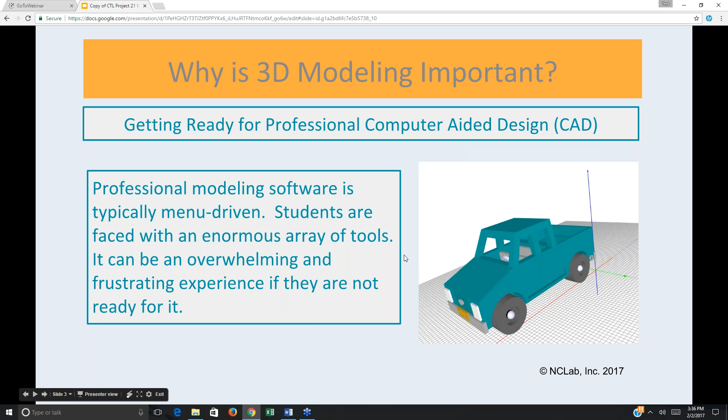They're going to be more successful if they get that visual spatial reasoning underlying what they need to do in the programs. And that involves learning how to move, rotate, scale objects, subtract objects, and other essential solid geometry skills. You'll see what I mean here in a moment. And also how to build complex designs from simple ones.

Here's some examples. This is a teepee that's built actually from a cone by changing the cone characteristics. Here's a DNA model that's built using a simple set of bars and then running them up a spiral. And over here is a three-dimensional Tetris, which is quite fun to work with. But boy, that really stretches your understanding of rotation and movement when you try and fit the pieces together.

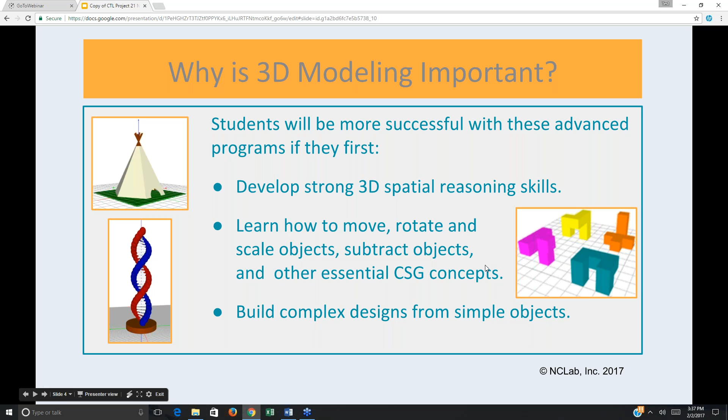So this is the other main reason why we're doing this: jobs. Think of the companies that are moving into Nevada, they want their technicians to have a solid foundation in these skills. So here's some examples. Manufacturing - you might be building a prototype or you might be on the production line, but you're going to be using those skills either way.

If you go into entertainment, animation is a huge component of entertainment. Think of all the movies you've watched recently, whether they're realistic or cartoons, they use computer graphics. This is also used to train people. It's used in sales. It's used in forensics to model what might have happened. And then if we look at science, we model things all the time, whether it's a molecule to a large-scale model of the universe.

In engineering, we build models and test them. And this is something that you can do even in a simple software like ours - you can build a model and test limits on it. Architecture is definitely built up of simple geometric components. Think about operating drones in 3D space - you're moving them in different directions, up, down, tilting them, rotating them, and so forth.

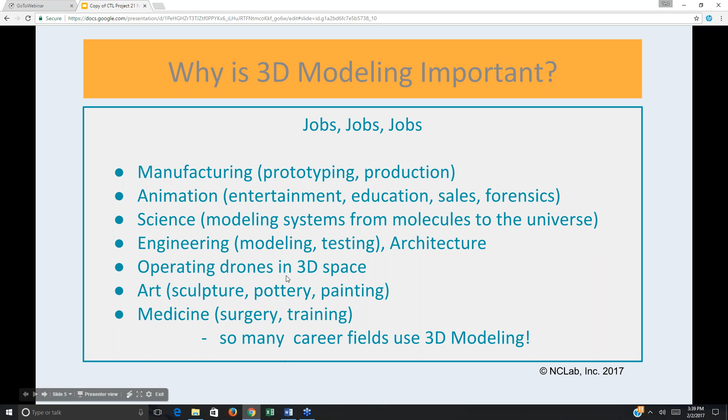Medicine - surgery these days, doctors are going in with cameras and working on organs within the body in 3 dimensions. And you can think of the old medicine, people worked on cadavers. Well, they don't do that so much anymore. They use 3D software to train on what they're going to be doing on real humans. So many career fields use 3D modeling, and there's plenty more besides the examples I've listed here.

Okay, so it's fun. It's a fun way to learn. It helps you visualize mathematical concepts, and students really enjoy building their own creations. So here's some examples of models that were built in the software and then fabricated on a 3D printer. There's a Colosseum, there's a functional gear, and there's a beautiful flower. So there's architecture, there's engineering, and art.

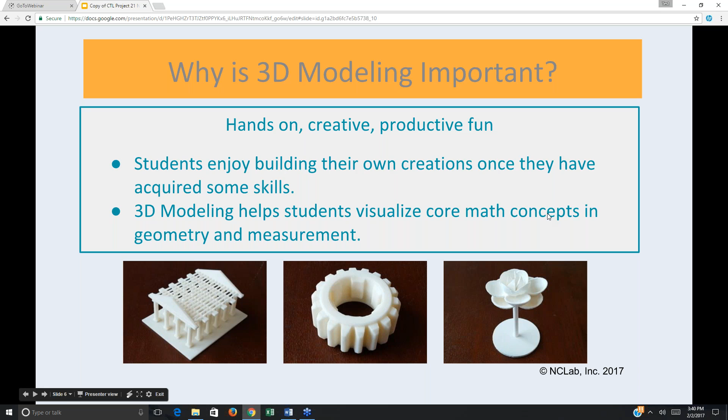All right, so last time we looked at Karel, and the screen for 3D modeling is very similar. You're typing code on the left-hand side, and then when you run it, you produce a model on the right-hand side. So you get instant feedback for anything that you script. The script builds language, it builds logic, it's writing and math, and the model on the right, that's what the results are going to look like.

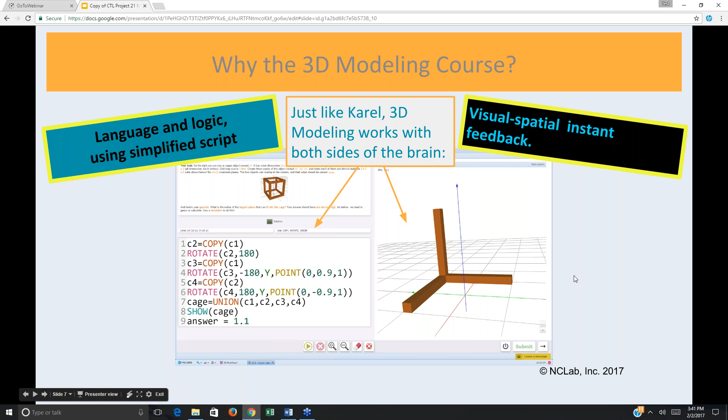So you're working with multiple areas in the brain, both sides if you like to use those terms. And this is powerful for building all these senses that we want in our kids - their math senses and their visual spatial senses.

So it's actually very easy to write, and then if you want to make a bigger sphere or a smaller sphere, you just change that number, and this is where it starts.

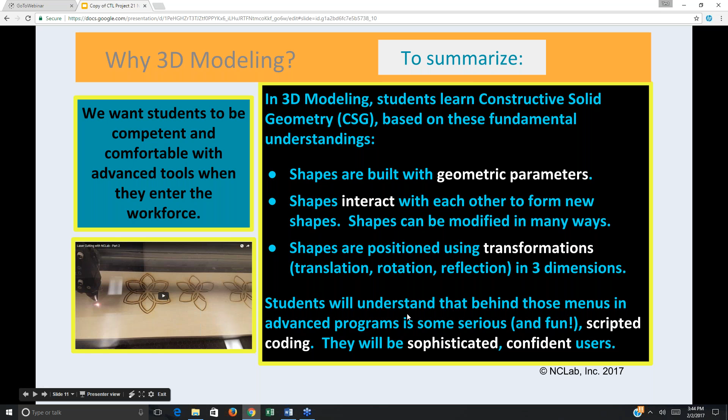By the end of the unit, they're going to be able to script many different 2D shapes, move them in the XY plane, subtract and combine them to form complex composite models, and then extrude them to 3D. Extrude is a very simple command, it just makes a plate out of this design, so they can even start printing any of these objects right from the beginning.

But of course, we're adding the scripting piece, so they're actually assigning numbers to that. By the end of that unit, they have learned how to create 3D objects, such as cylinders and cones and tubes, and they're starting to learn some complex rotations in 3 dimensions.

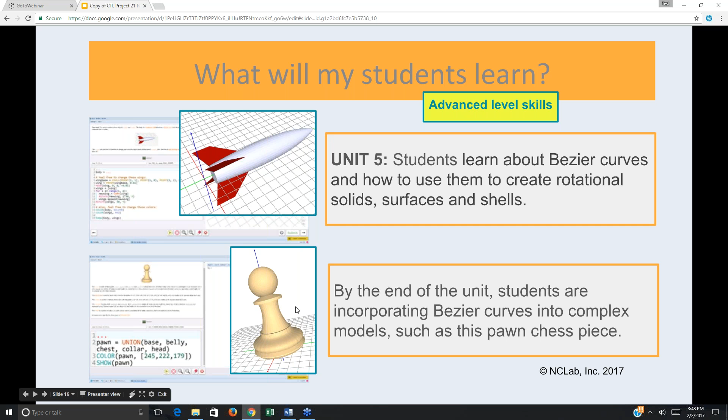So they should be able to create an object like this chess piece at the end. And that's the course in a nutshell. All right, so how are they going to learn this? Well...

Self-paced and self-graded means just that. You can use the course just by itself. There's always some form of context to give them ideas of where they could apply their skills.

Every section has step-by-step videos showing them how to do it. There are a series of instructional screens that build in the understanding of what they're doing. There are demonstration levels where they might just run it or just add a simple piece of code. It's mostly done for them to see how it works.

The sections are all scaffolded, so they start with something simple and build to more complex, and also start with a lot of the code written and move towards the students writing the code for themselves. There's a feature called the code template, which is a button. If they get really stuck, they can hit that button. It'll supply most of the code so they can fill in the blanks.

You can see this from your teacher view, which students have used this and which have not. There's a drop-down help menu, which is a list of commands and has a textbook and videos that they can access at any time. We're going to look at this, see what this looks like in a moment here. When they submit a level, they'll always see how they did and get some feedback.

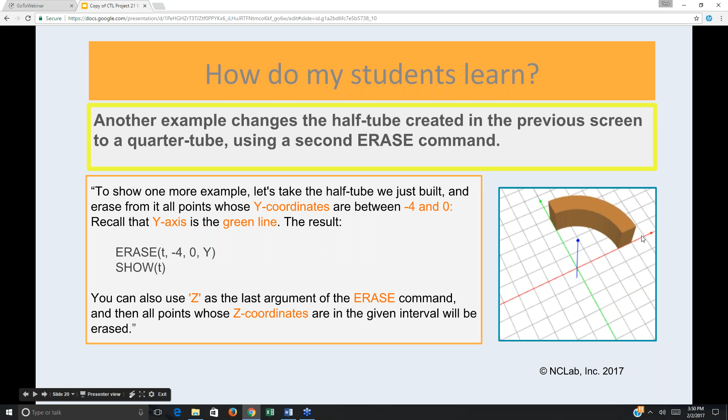And then at the next screen it states the objective and provides an example. So here's a tube, and they're showing what happens when you erase half the tube and you get this shape here. And then there's a second example provided. In this case, we've erased it in half again, so now we have a quarter. And then the next screen is the video. So students would then watch this video to see how to do this whole process.

All right, so now they get to try the code themselves. On the left, you can see what the screen looks like without the code template. So they're actually writing a lot of the code, or just about all the code, actually. You can't see it because the writing's really small, but in the upper left, most of the numbers are provided and the instructions are pretty explicit. This really is a guided practice.

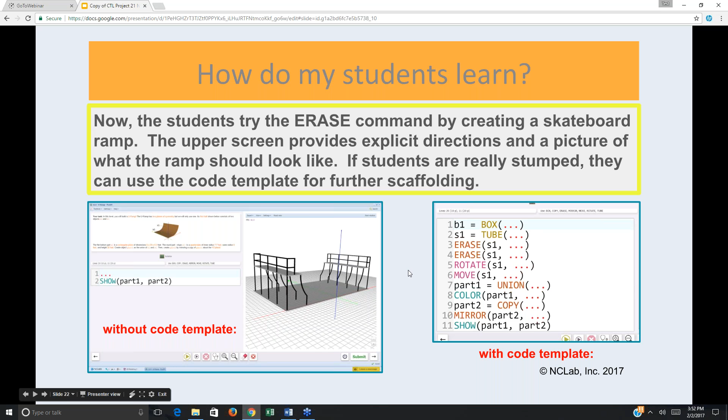If they have trouble with that, even with all that guidance from the top screen, they can use the code template, which is the red button at the bottom, and it'll pop up this, so it becomes fill in the blanks. So that's going to help your students who are maybe not very confident or they are struggling for some reason. They can use the code template.

All right, after they submit it, they're going to get some feedback. I made some deliberate mistakes in here, so it popped up this box on the left. It said try again. It explained why it didn't work. And then on the picture side, it shows what I drew in red. There's my tube way over here. It's way too big and it's in the wrong spot. And it also shows what it should look like in green. So I get a visual feedback as well on how it was supposed to work and why it didn't work.

This is how the course is built. They're learning one level at a time, and right now the 3D modeling course is divided into 5 units. Units 1 to 4 have 5 sections, and you can think of a section as a concept arc. Each section has 7 instructional levels, then a quiz level, and a project level, where they can design their own objects based on what they've learned. That gives you a performance task you can evaluate for grades. So the levels each represent one step of instruction or practice within the concept arc. By the end of 7 levels, hopefully they've got it. This is systematic instruction with practice and gradual release, and there's 234 levels in all, so it's very gradual.

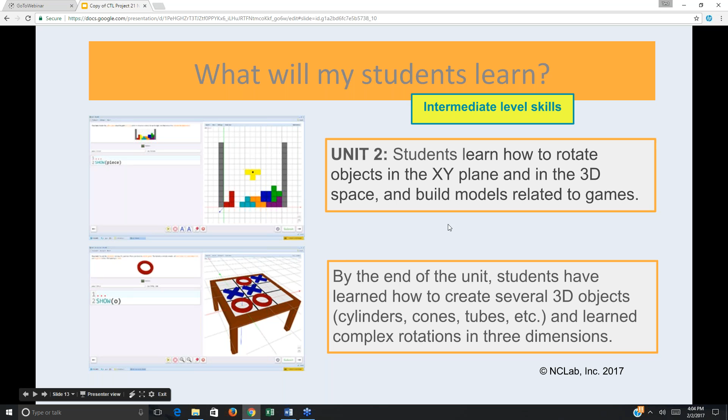So, yes, you could make this fill a full semester, especially if you add student journals and other activities, maybe a group project, or maybe have them apply it to a STEM subject area. That's good.

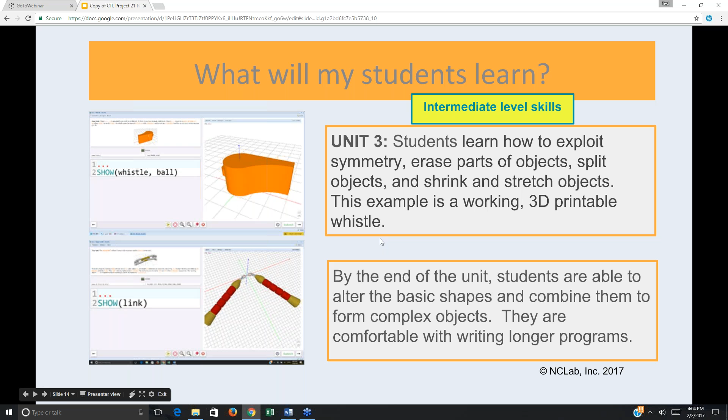Yeah, and yes, some of this stuff is pretty advanced, but it depends on what skills they're coming in with. I think as our students grow, they'll have had a little more experience with, say, basic coding, and then the coding's not so intimidating. Sorry, I'll just finish off that: if you have a high level student, that's great. Have them build stuff. They will be entertained for hours and hours because with building the sky is the limit.

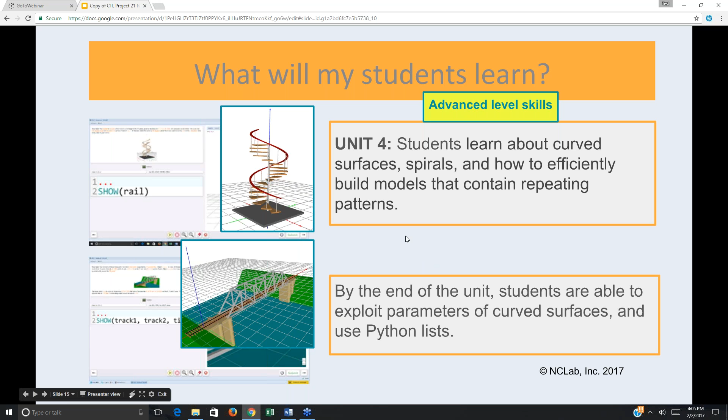The question I had was, in the teachers seeing where the students are at, does that keep track of how long they've actually been on the site or coding? Not in 3D. We do show in Karel and Tina, it shows how long they've spent on each level. But right now on 3D, it just shows that they've completed it and how many points they got.

Another question: say a couple students have an issue and you want to do a class on it, the source material for the teacher to do that, where would they find that? This hasn't been published yet, but we should have it ready for the March 4th training. We're completely redoing the lesson plans so that they're a little easier to use. Each section has a 2-page lesson plan layout, and it includes all the links to the videos. It will include a link to a slideshow, so the slideshow could be thrown up on a smart board and gone through the steps.

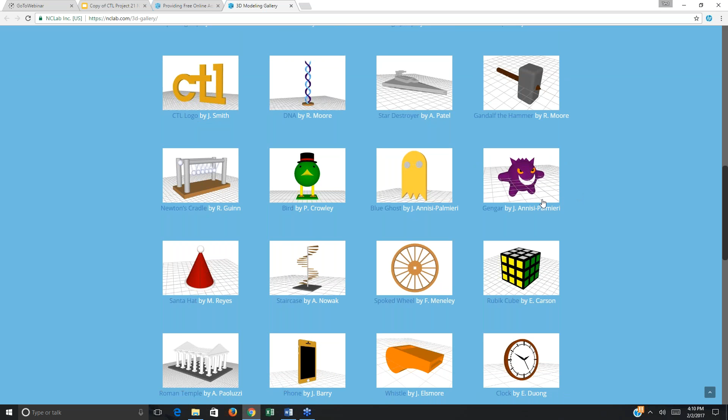And this is pretty cool too, because you can pull up the code. See, these are some of the things that kids have made. So you can submit a design to NCLab and we'll publish it. If I click on the drawing, it'll just display it in 3D space. If I click on the link, it'll actually open it and show the code. So there's the code. And if I run it, it'll just take a moment here.

Wow, that's really neat. I noticed that somebody made a CTL one. Oh yeah, yeah, I wonder who did that.

The other thing you can do with kids who get it quickly is have them become student teachers or student mentors, aides for your class. You don't want to exploit that all the time, but you'd be surprised - it's not always the same students who master something.

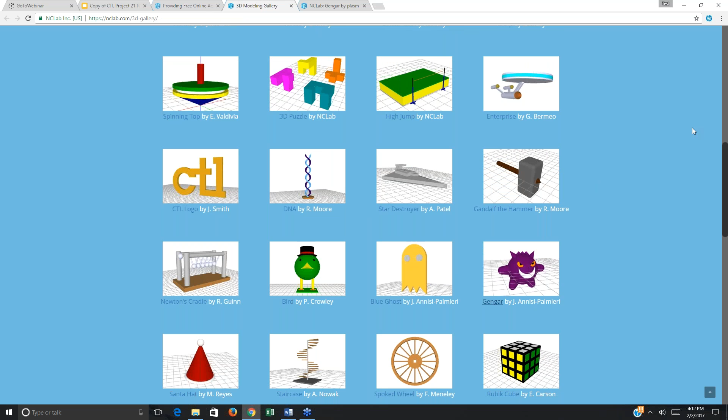But yes, this is something I think would encourage the students - to look at some of these drawings and see how they're built with code. They can build anything they want, and the files stay with them even when they aren't in the course anymore. It's theirs forever.

Good, actually you handled a lot of the questions that came through - you asked them yourself in your different sections there. So excellent job. Amy, I think we're done with the questions unless you got one that came in. No, nope, I think we've covered quite a bit.